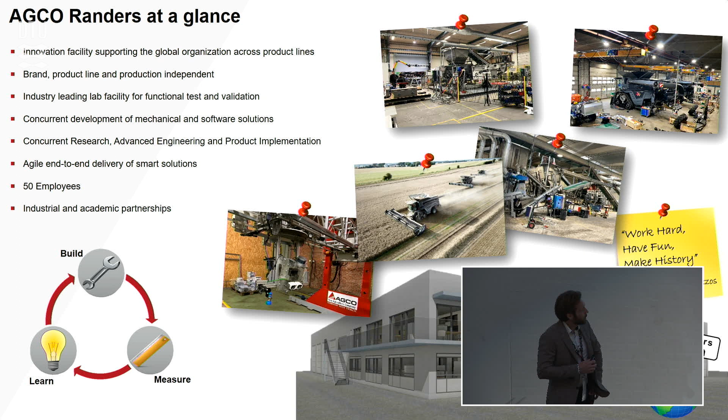What makes this engineering center rather unique, in AGCO at least, is that it is the only engineering facility that is not attached directly to a production facility. Moreover, we are not attached to a specific product line or even a specific brand per se.

Because of that freedom, we have over the years kind of developed ourselves to become this more independent entity, focusing on research, advanced engineering, and ultimately technology development to support our different product lines globally. So just like our industry and AGCO by and large are going through this kind of transformation from being a provider of steel and iron to become a provider of technology and solutions, so is the internal competences and focus area transforming within the engineering group, and in particular within our group here in Randers.

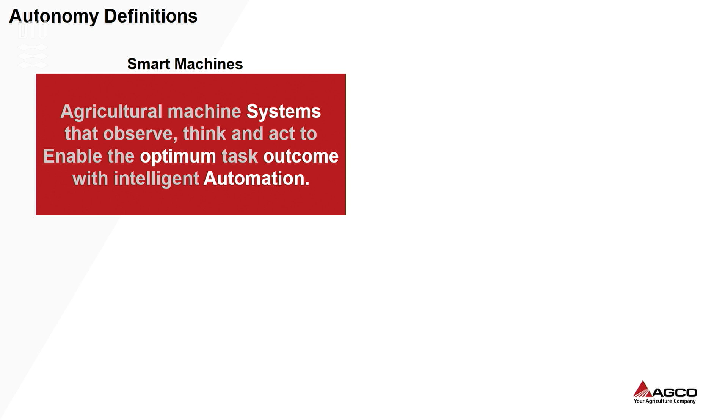So speaking of new technology domains, the main overarching focus is automation and autonomy, which is what I will dive into now. So before I go too specific about our effort on autonomy, I want to highlight a couple of definitions that we at least work on within AGCO when we talk about autonomy.

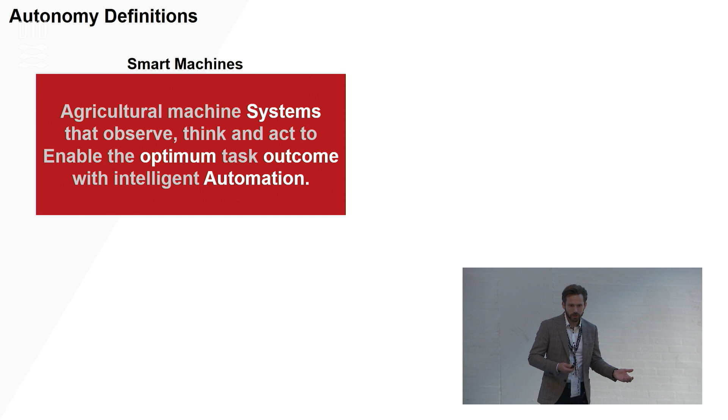So we have kind of two objectives within this broad theme. The first and overarching objective talks about smart machinery, which in a nutshell is about automation of our machines, the operations that the machines perform, not only at the machine level, but also as machines collaborate with each other, and as machinery and operations are depending on each other across the whole cropping cycle within arable farming.

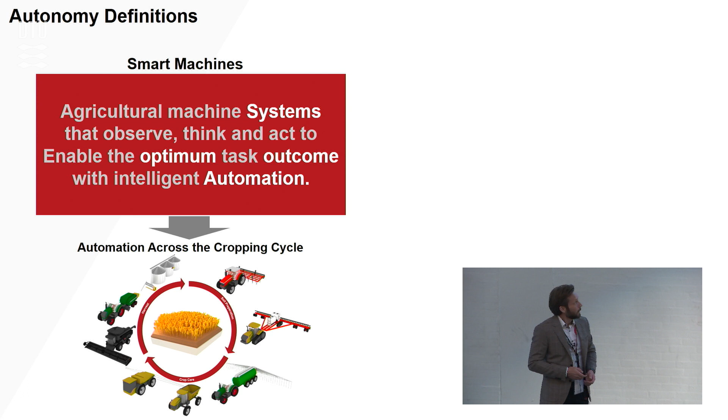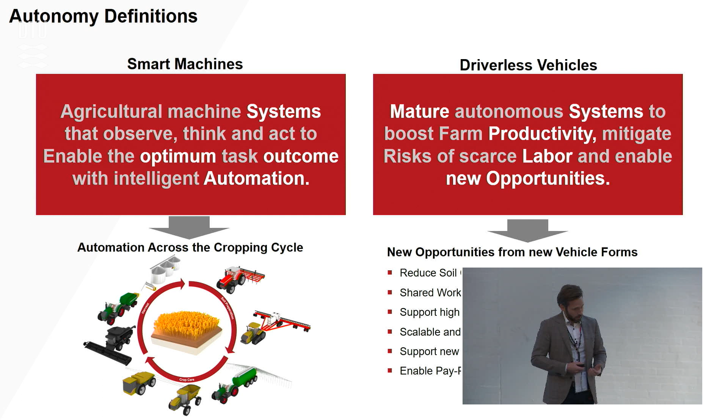The other theme talks about driverless vehicles. Now, driverless vehicles, in our mind, is not the end goal per se. Driverless vehicles is an enabling technology that will allow us to advance the automation to the point where we are capable of talking about redefining the vehicle platforms. So start talking about taking advantage of not necessarily having an operator on each entity, and therefore move towards larger fleets of smaller units.

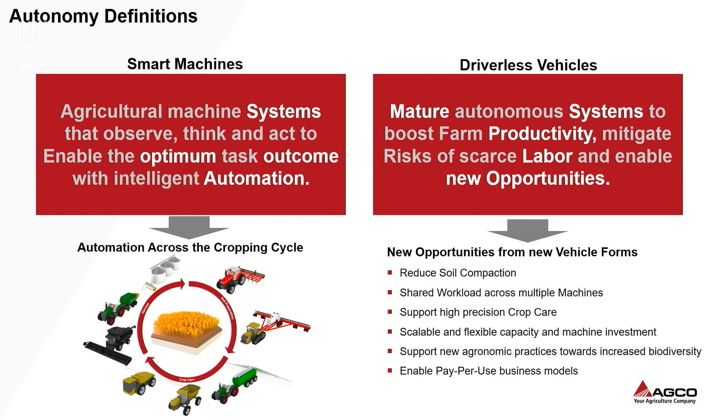With all of these benefits that I'm sure you have probably heard of before, so I'm not going to dive into that. What I find a bit more interesting, to be honest, is not the end destination, it's more the journey. So that roadmap, by and large, we envision looking something like this.

So start over here to the left with smart machines, meaning automation of single entities, single machinery, single processes, towards automation of connected machinery, looking at field operation from more of a system of systems approach. This is also where we can start to talk about manned vehicles collaborating with unmanned vehicles, still having the unmanned vehicles being supervised by the manned vehicles. And then towards the end game, if you will, fully autonomous fleets.

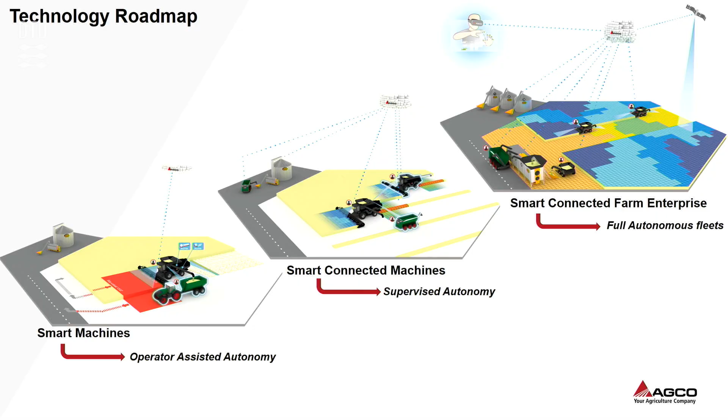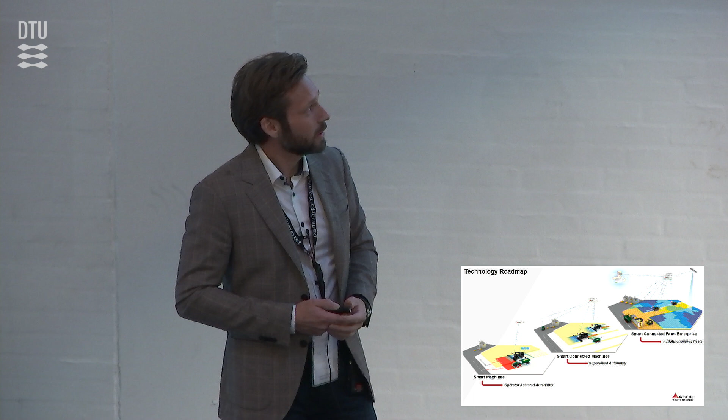Now, as a company and as a team in Randers, we are working on all different elements here. So just by way of example, I'm going to give you an example of each of these.

First of all, we have our IDEALharvest, which is our automation system of our combines, which is really what was kicked off with our initial collaboration with DTU back 5-6 years ago. Then, secondly, as we talk about connected machinery, we have an example here with what we call GuideConnect, which allows one tractor to take control over an unmanned tractor, basically a leader-follower principle. Last but not least, when we talk about full autonomous units, we have our Xaver robots, swarm robots, developed for the specific purpose of seeding.

As you can imagine, the overall path as we move forward is to bring more and more advanced machinery, field operations, further and further to the right of this image here. The combine here is probably going to be one of the last pieces of equipment that will make it all the way to the right, given the complexity of the machine and of the process.

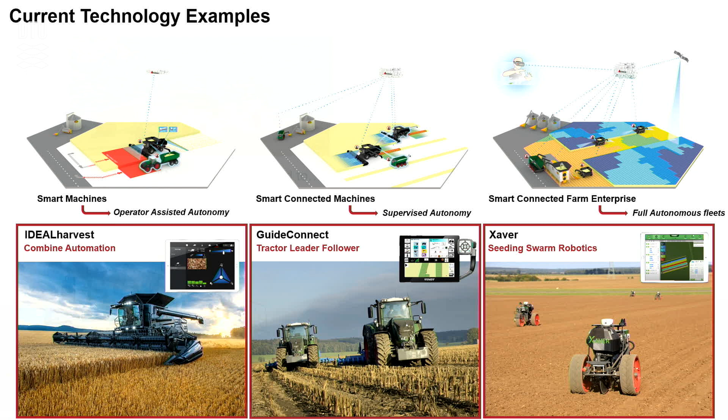But what does it take to actually bring a machine and a field operation towards automation and towards autonomy? Let's have a look at this example, picking on another fairly complicated piece of equipment or field operation: baling. This consists of a vehicle system with a high horsepower tractor and a pulled-behind large square baler.

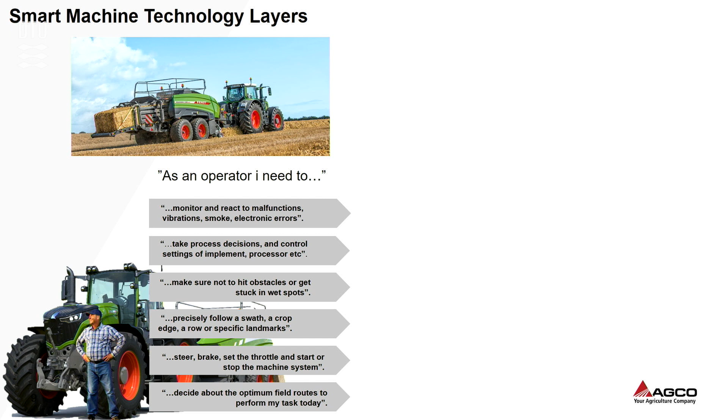So today, as an operator of this system, there is a number of tasks that he needs to perform in order to do his job and in order to optimize this task. As we talk about automation, all of these provide opportunities for us to assist the operator with more or less automated systems.

All the way from generating optimized route plans, allowing the vehicle to automatically perform these route plans by controlling the speed and heading of the vehicle, being able to adapt that global route plan to the specific field conditions you are in, to also detect and react to obstacles.

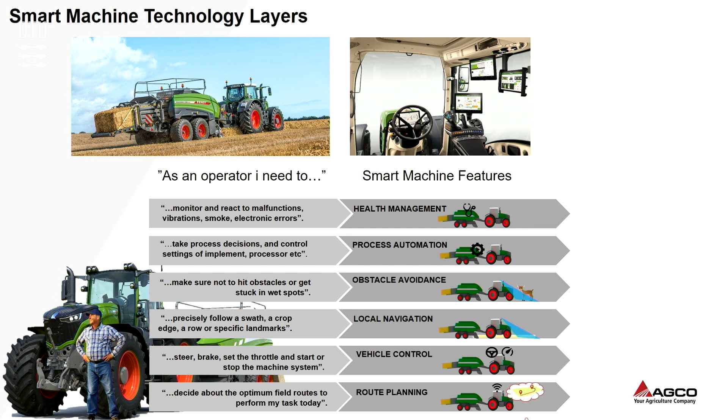And then one of the important pieces is the actual process automation of the task you're performing. In this case, it's producing bales. Last but not least, monitoring and diagnosis of the full system. So all of these technical layers provide opportunities for integration of smart machine features that optimize or enable the operator to optimize his operation here.

As we advance these technologies, we can imagine advancing them to the point where we can start talking about driverless vehicles. So to the point where we don't need an operator on the vehicle to supervise the operation — he can do that remotely somehow. When we get to that point, there are of course other elements to take into consideration that go across the whole theme of unmanned or driverless vehicles. Security and safety being one of the bigger problems to tackle.

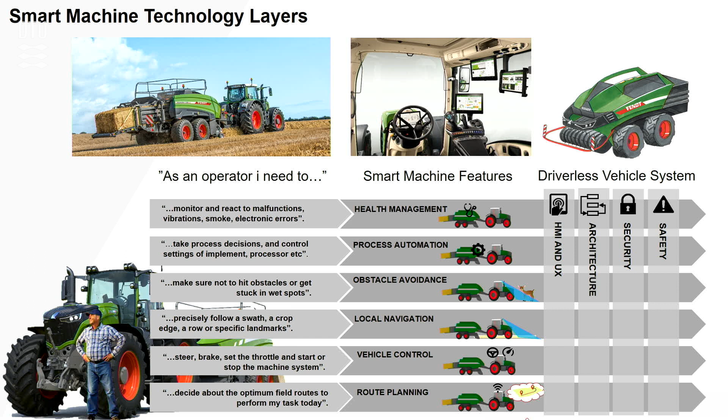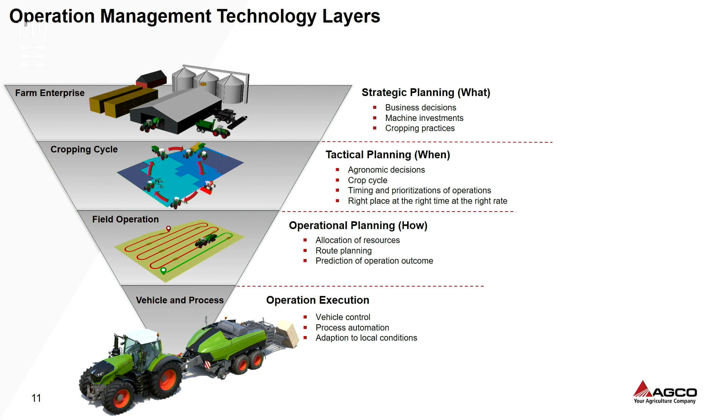Now, I said that automation, in our view, is not just about a specific vehicle. It's more about the task to perform. And if you talk about a specific field task, there's a lot of decisions, and therefore also optimization and automation opportunities that exist even before you actually go to the field. High-levelly described here with these decision layers, stretching all the way from the strategic planning of actually investing in equipment or farming practices, to performing the tactical planning on when to actually perform a task, to the operational planning on how to actually go about it before you can execute the task.

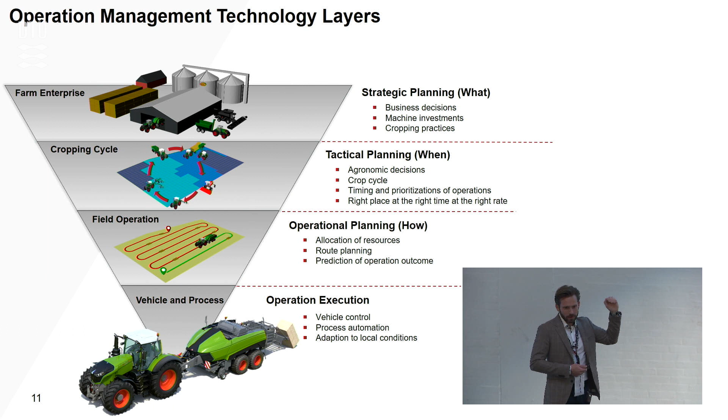So it means that when we talk about automation, we're also focusing on automating and supporting the end user with these decisions, ultimately looking at a seamless user experience across all of these solutions, all the way from the off-board solutions and technologies, to the vehicle for our more on-board solutions.

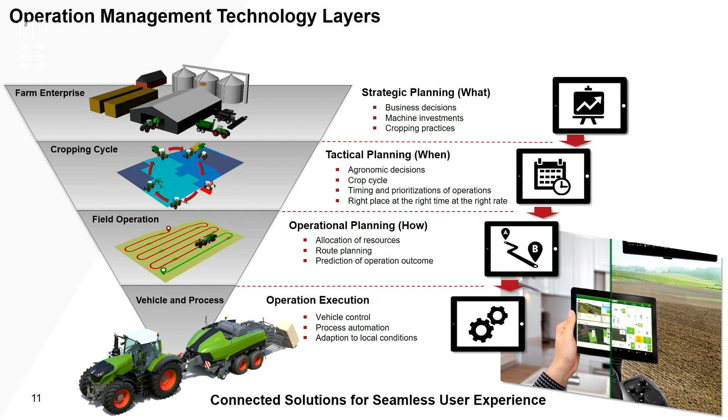So talking about the future is always easy, because no one can really argue against you, at least not with evidence, because no one really knows, right? And this is also why trying to predict the future and create this nice vision, blue sky thinking, where we have fully autonomous systems and technology is not an obstacle, legislation is not an obstacle, everything is possible — that's the easy piece of it. The challenging piece is to understand and define the next step, and the next step, on that journey.

And that's also the interesting challenge that I see. And one of the reasons that this is a challenge is because of the adoption of technology, especially in our industry, is never happening as fast as we think it will, and definitely not as fast as we as engineers would like it to happen, right?